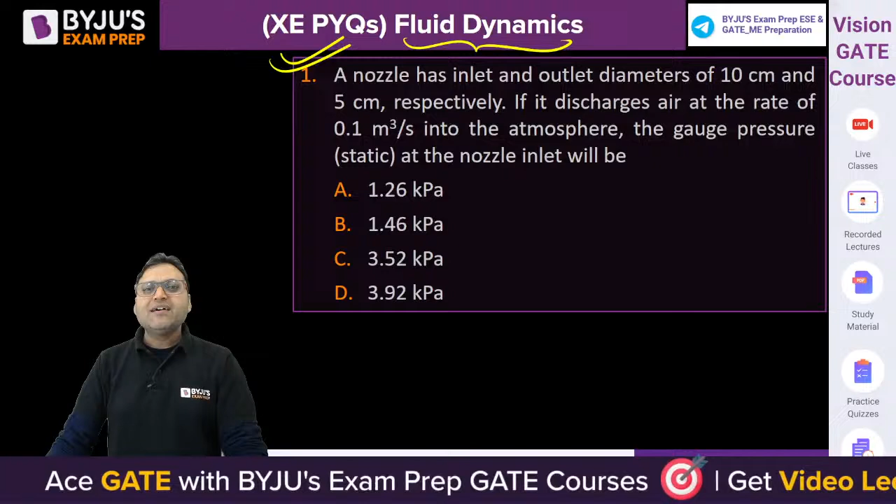All right, so let us start with question number 1. The questions are from dynamics, which will include the ideal flow, that is Bernoulli equation and its application, and real flow. Including ideal and real flow, we will discuss some important questions which were asked in previous GATE engineering science paper. The difficulty level of engineering science paper is same as that of your GATE ME or CE papers. So it is going to help you a lot in improving your fundamentals, in knowing your level of preparation. If you are able to solve these questions without any support, without any help, it means your preparation is up to the mark.

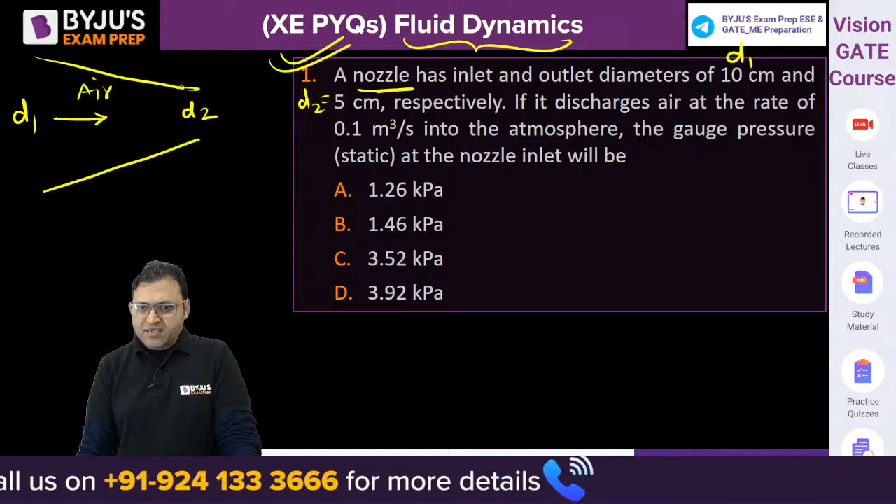The question says a nozzle has inlet and outlet. What is a nozzle? A converging section. The nozzle is having an inlet diameter D1 and outlet diameter D2. D1 is 10 centimeter and D2 is 5 centimeter. If it discharges air - the fluid flowing is air - when we are using air in fluid mechanics, we will assume it as incompressible fluid, right? The discharge of air flow is 0.1 meter cube per second into the atmosphere. We need to find out the gauge pressure at the nozzle inlet, at point 1. Can you calculate the gauge pressure at 1? Can you give it a try quickly?

Can you try it? Yes, every one of you, please give it a try. The first equation we are supposed to use is the continuity equation, that is the mass conservation, because the flow is assumed to be steady, incompressible and one dimensional. So we can say A1 V1 is equal to A2 V2 is constant. Discharge will remain constant. So we can say D1 square into V1 is equal to D2 square into V2.

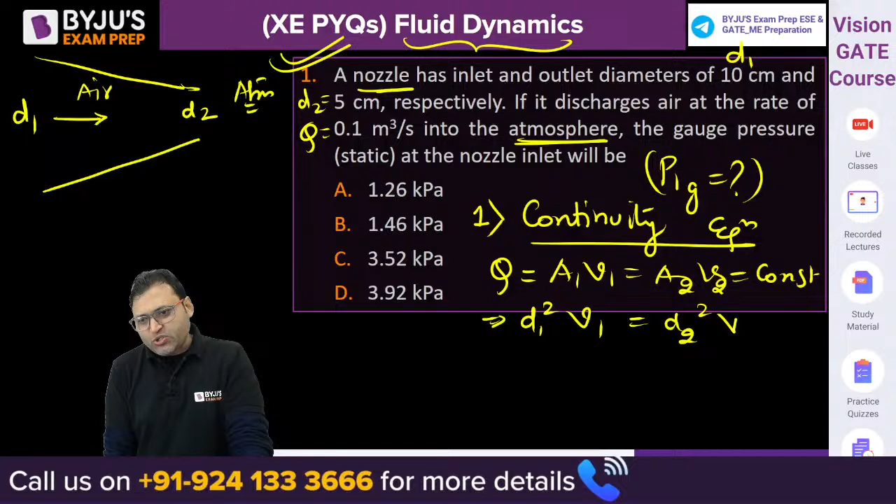D1 and D2 are given to us. So can you develop a relation between V2 and V1? Is this the right relationship between V2 and V1? V2 is 4 times of V1 because D1 is twice of D2. Velocity at 2 will be more, it is 4 times of V1.

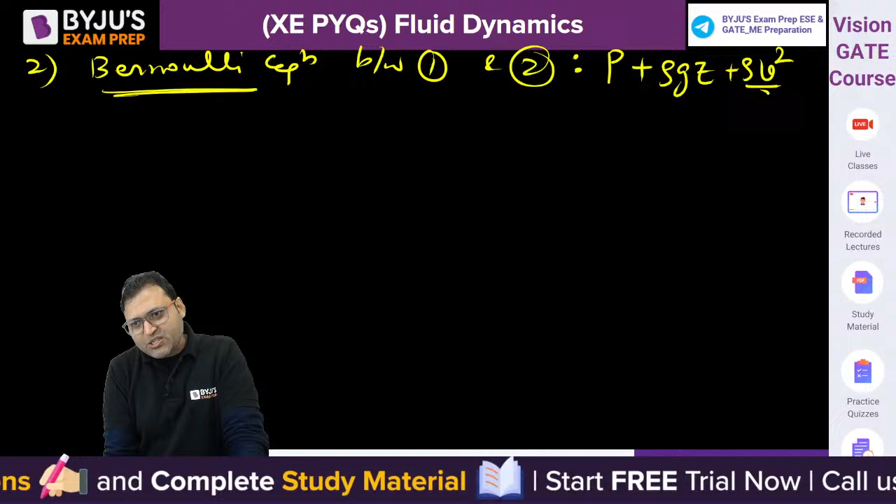Then the next equation is the Bernoulli equation between 1 and 2, inlet and outlet. Bernoulli equation is the energy equation in case of ideal flow. If we write the Bernoulli equation in terms of pressure, P plus rho g z plus rho V square by 2 is constant, isn't it? So can we write P1 plus rho g z1 plus rho V1 square by 2 is equal to P2 plus rho g z2 plus rho V2 square by 2.

It is a horizontal pipe, there is no change in potential energy. We can either take the gauge pressure or the absolute pressure. The gauge pressure at point 2 is 0 because the fluid is discharged into the atmosphere. So we can easily find out P1 gauge. It is rho by 2 into V2 square minus V1 square, isn't it? V2 is equal to 4 V1, so it will be 16 V1 square minus V1 square, that is 15. So P1 gauge is equal to 15 rho V1 square by 2. This will give you the answer.

What is V1? Q is equal to pi by 4 D1 square into V1. From here we can find out the value of V1, 4Q by pi D1 square. Put the value 4 into Q; discharge is given as 0.1. Upon pi, what is D1? D1 is 10 centimeter, so 0.1 meter, 0.1 square. This will get cancelled out. What will be the value of V1? 4 upon 0.1 pi, isn't it? 40 by pi. So V1 will be equal to 12.73.

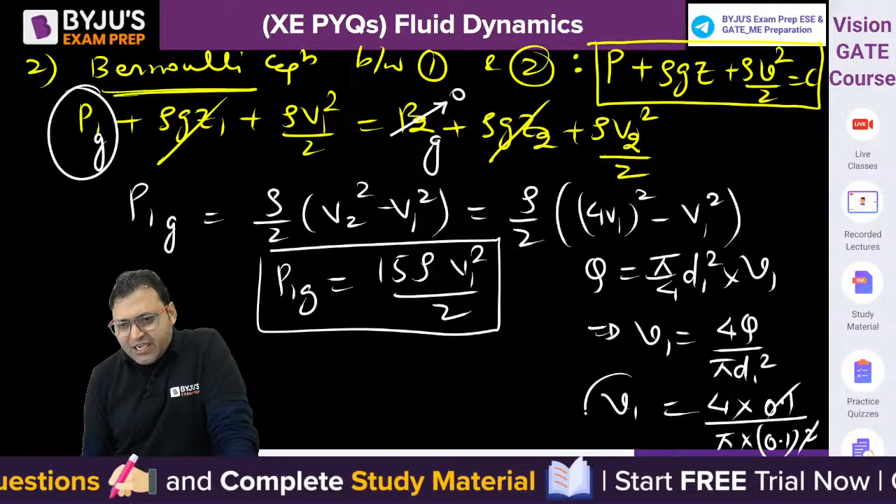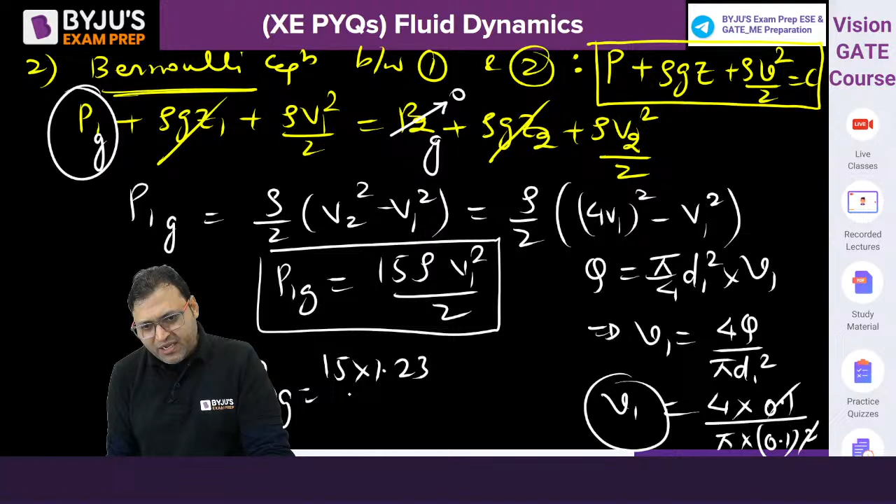Yes, well done. So V1 you can easily find out. Put the value in P1 gauge. Air density is not given, but you should have an idea. Density of air is around 1.23 kg per meter cube. So it is 15 into 1.23 by 2 into V1 square, 12.73 square. That will be in Pascal, so it will be around 1459 Pascal. In kilopascal, it is around 1.46.

Are you guys getting it or not? Yes? The answer B is the correct answer. Yes, well done. Good, good, good. What about others?

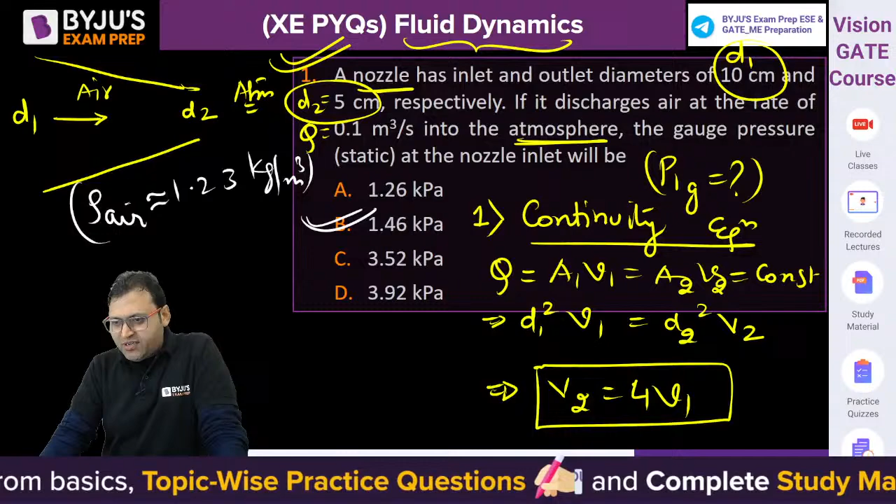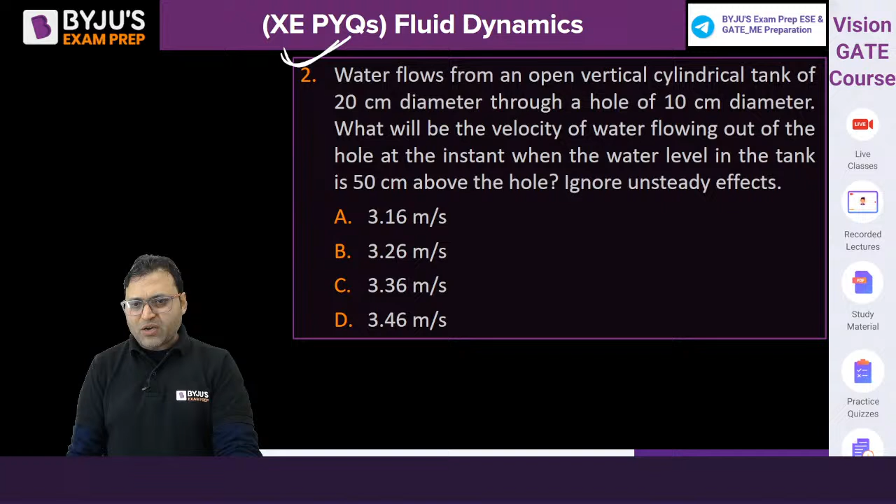Question number 2 on your screen. The previous question was asked in GATE 2009. Let me write, this was asked in 2009. And this question number 2 was also asked in 2009. Can you solve this?

Water flows from an open vertical cylindrical tank. There is a cylindrical tank, open from the top, of 20 centimeter diameter, capital D is 20 centimeter, through a hole of 10 centimeter diameter. Small d is equal to 10 centimeter. The water is flowing like this. The fluid is water. What will be the velocity of water flowing out of the hole? We need to find out this velocity.

What is the velocity of the fluid flowing out of the hole at the instant when the water level in the tank is 50 centimeter above the hole? This is, let us say, H, which is equal to 50 centimeter. Ignore unsteady effects. Can you simplify this? This is the free surface.

So again, if we apply the equations between 1 and 2, let me call this point 1 and this, let us say, 2. So P1 and P2 will be equal. P1 is equal to P2 is equal to P atm. If we take this as reference line, then Z1 is equal to 0 and Z2 is equal to H, that is 50 centimeter. So first of all, apply the continuity equation.

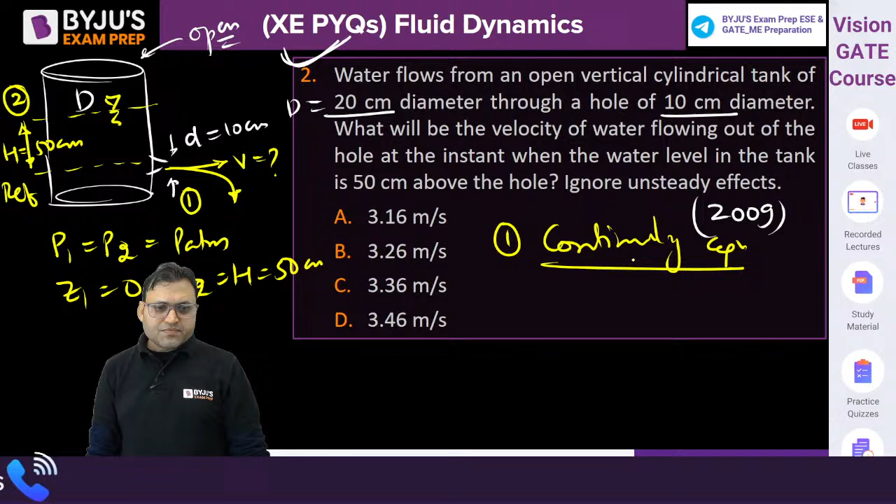So we can say discharge remains constant. So discharge decreasing will be equal to discharge leaving. Here the velocity is, let us say, V2. Here the velocity is V1. So can we say Q is equal to pi by 4 D square into V2 is equal to pi by 4 d square into V1. Pi by 4 getting cancelled out. Again we can develop a relation. V1 is equal to 4 times of V2, isn't it?

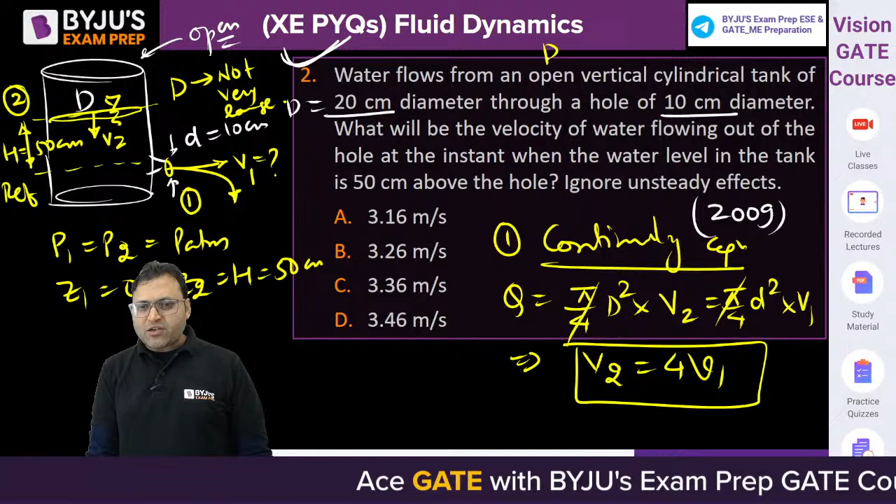Discharge will remain constant. Discharge decreasing in the tank is equal to discharge leaving from the orifice. Yes or no? So V2 is not taken as 0 because the diameter is not very large compared to small diameter. That is the catch here. The diameter, capital D, is twice of small d. So V2 cannot be ignored. V1 will come out to be 4V2. Now we apply the Bernoulli equation, similar to the previous question.

If we apply the Bernoulli equation, P1 by rho g plus Z1 plus V1 square by 2g is equal to P2 by rho g plus Z2 plus V2 square by 2g. Z1 is equal to 0. P1 and P2 are equal. Our objective is to find out V1 square. So we can say V1 square minus V2 square by 2g is equal to Z2, that is H. So V1 square minus V2 square is equal to 2gH.

And what is V2? V1 is equal to 4V2. Let us put V1 is equal to 4V2. So 16V2 square minus V2 square is equal to 2gH. So V2 is equal to under root of 2gH upon 15. And what is V1? V1 is equal to 4V2. So it is 4 under root of 2 into 9.81, or let me call it 10, into H 0.5 upon 15 meter per second. That is the value of V1.

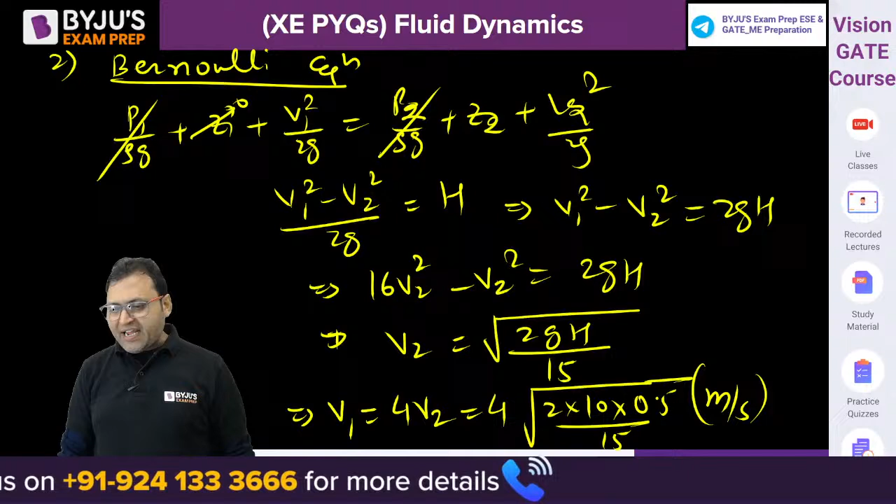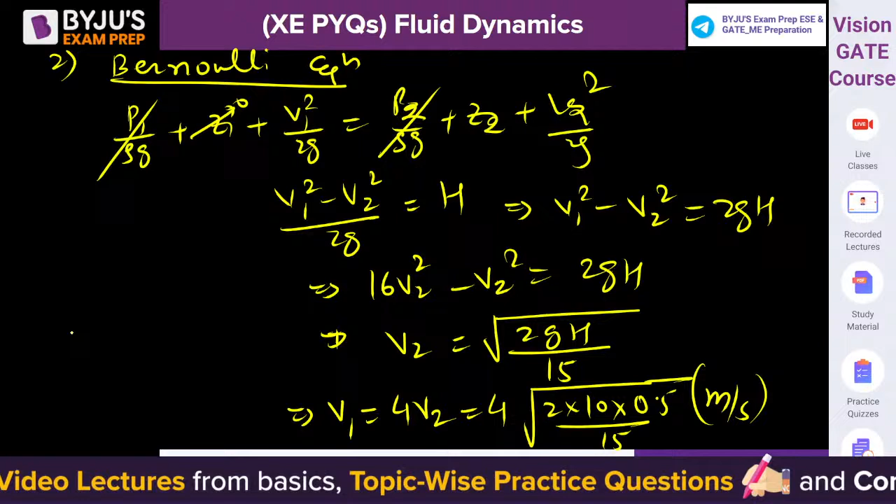Because the diameters are not, we write root 2gH only when the area of the tank is very, very large compared to the area of the orifice. Then we can say velocity in the tank is ignored, it can be taken as 0, then we can say velocity V1 is equal to root 2gH. But because the area of the tank is not very large, so how much is that?

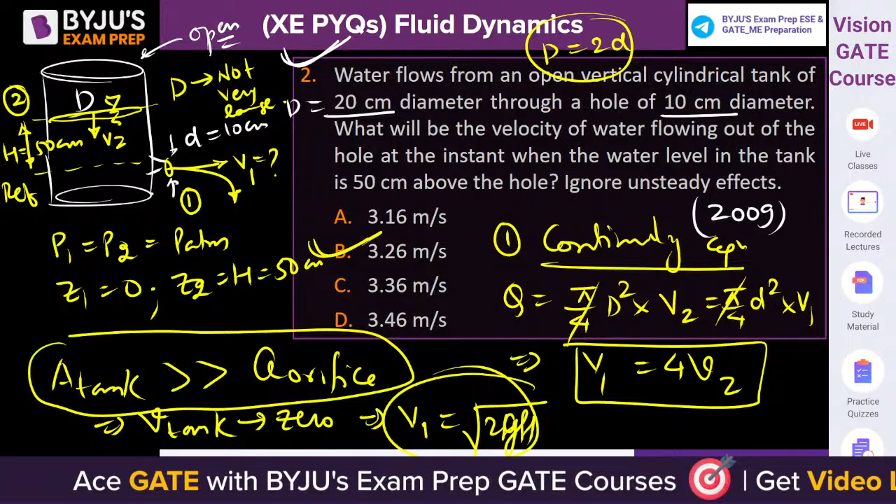50/15, sorry, 10/15, 2/3, under root into 4, 3.2659. Are you getting 3.26 something? B is the correct answer. Something around 3.26. B will be the correct answer for this one, right?

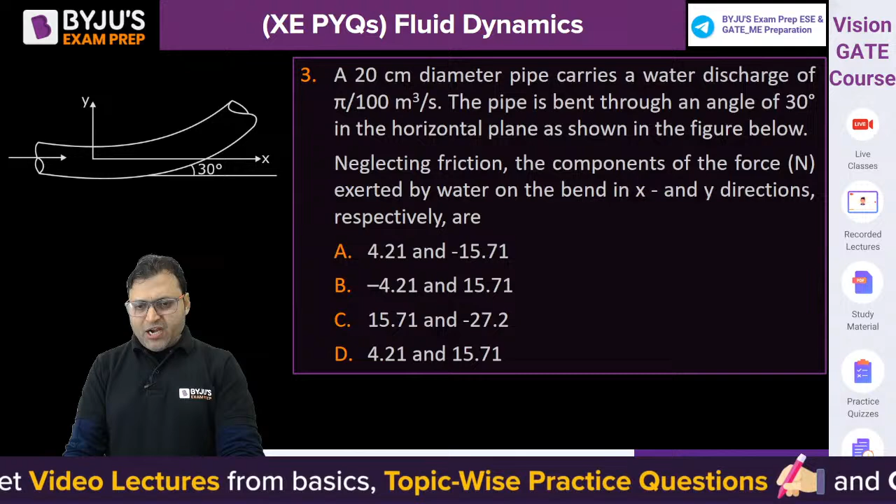The next question, question number 3. Try to solve the next one. Did you understand the question? This question was asked in 2010. A 20 centimeter diameter pipe carries water discharge of pi by 100 meter cube per second. The pipe is bent through an angle of 30 degree in the horizontal plane as shown in the figure. Neglecting friction, the component of force exerted by the water on the bend section in x and y direction will be?

So if you take this as the control volume, before the bend and after the bend, this is our control volume, isn't it? This is under observation. Due to the bend, there are forces developed and the water will exert a force on the walls of the pipe in normal and compressive direction. The force exerted by the water is normal and compressive, like this. This is the direction of force exerted by water.

And due to curved streamline, do you agree pressure at 1 is less than pressure at 2? In case of curved streamline, pressure on the inner walls will be less than pressure on the outer walls, and area due to contraction or due to bend, A1 is less than A2. So the force F1 will definitely be less than force F2. This is F1, this is F2. So F2 is greater than F1. So the net force will be like this.

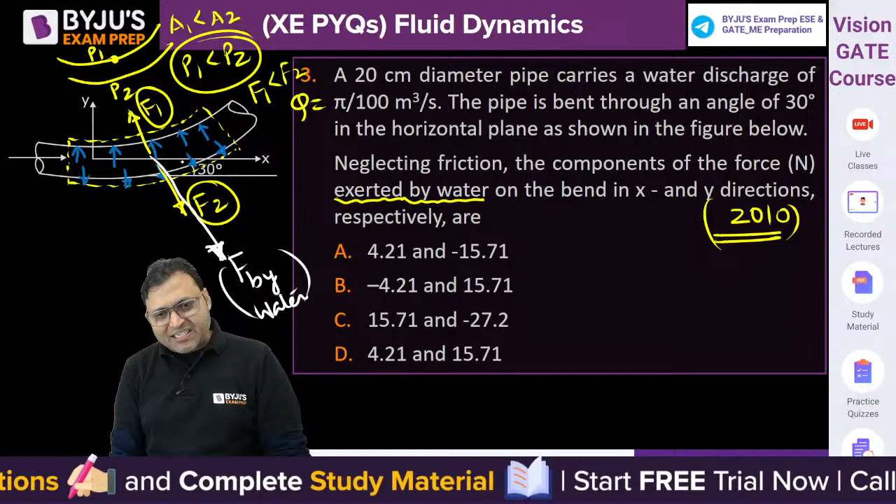The net force by the water on the bend is in this direction. Its component is in positive x direction and another component is in negative y direction, isn't it? There are two components of force by the water. One is positive x, another is negative y. Negative x is incorrect and both positive is also incorrect. B and D cannot be correct. It is either A or C, isn't it? Now we need to calculate the magnitude by using the momentum equation.

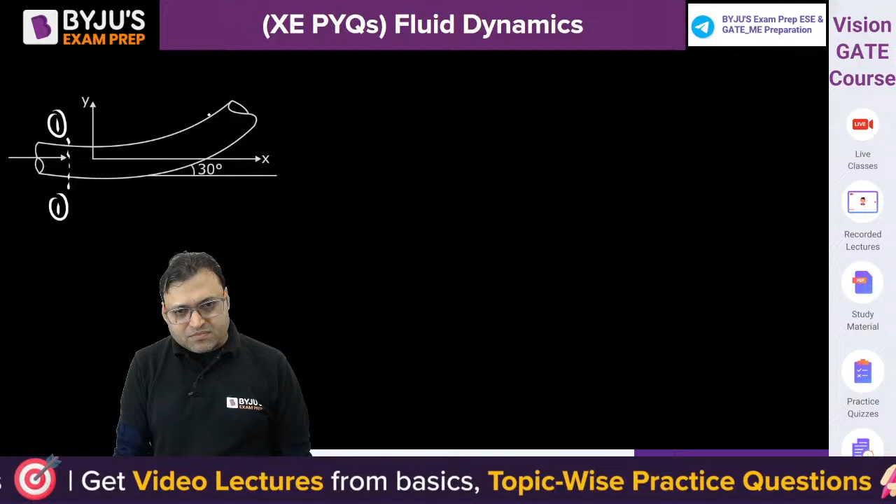We can say here, if we calculate the momentum equation, this is section 1, let us say, this is section 2, this is our control volume. So we can say area at 1 is equal to area at 2. So V1 is equal to V2, there is no change in velocity, and Z1 is equal to Z2 because it is in horizontal plane. So we can say according to Bernoulli equation, P1 is equal to P2. That is the Bernoulli equation.

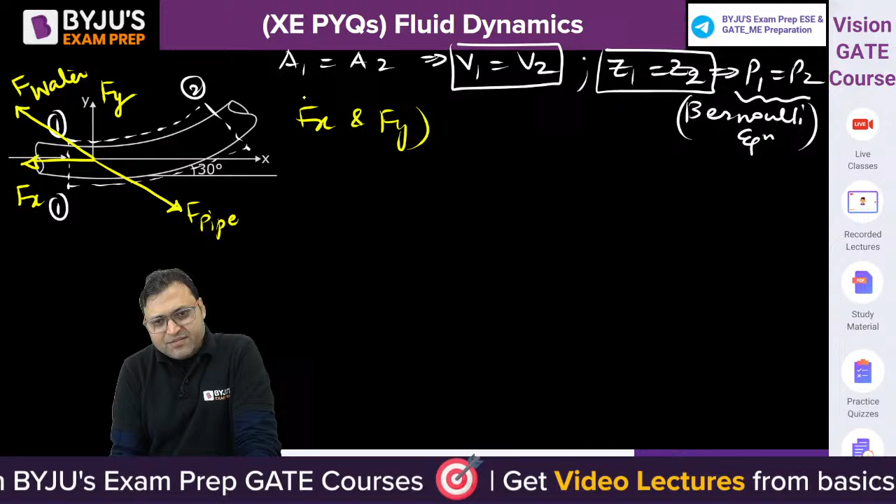Now if we assume Fx and Fy, Fx and Fy are forces on the fluid. So force on the pipe will be like this, and force on water will be like this. Force on water will have two components, one is Fx and another will be Fy. So Fx and Fy are forces on water in X and Y direction respectively.

So if we apply the momentum equation, first of all let us write the momentum equation in X direction for the water. This is our control volume. So P1A1 will be acting in X direction, then minus Fx force on the water, then P2A2 component minus P2A2 cos 30 is equal to rho into Q, density into discharge, into change in velocity, because we are writing the momentum equation for the water.

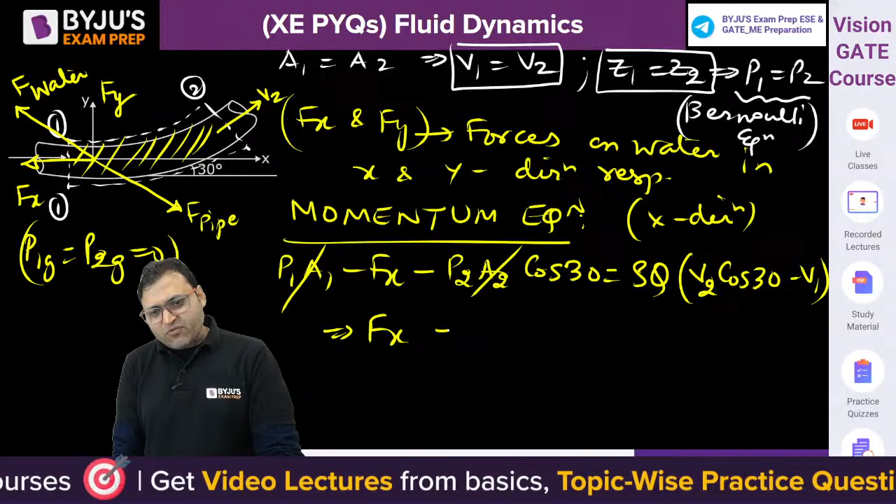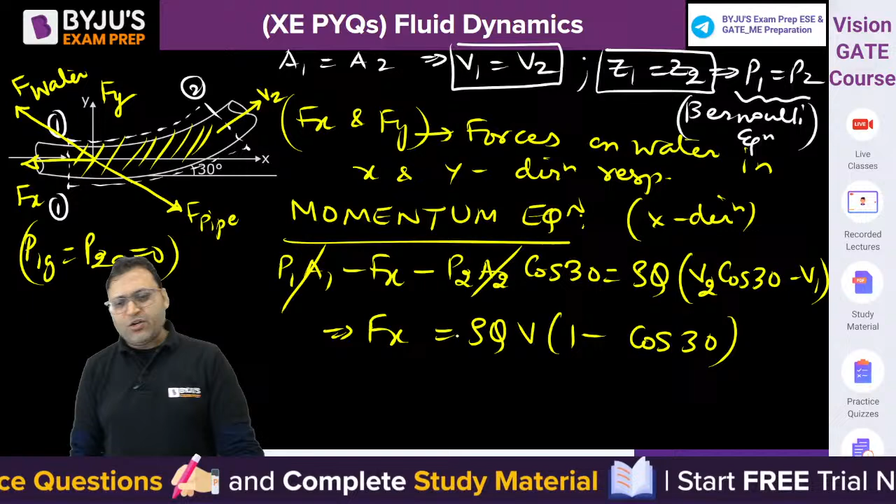So final velocity V2 cos 30 minus V1. P1A1 and P2A2 are both 0. P1 gauge is equal to P2 gauge is equal to 0. So we can say Fx will be equal to rho into Q into V into 1 minus cos 30. What is V? V can be written as 4Q by pi d square. So rho Q 4Q upon pi d square into 1 minus cos 30.

Can you solve it? Cos 30 is root 3 by 2. Can you solve it and let me know the answer? Can you find out the value Fx? Discharge is given, density is 1000. So if you are able to calculate Fx, diameter is given as 20 centimeter. Put the values, you will get the answer. Can you solve it?

Are you getting 4.21 Newton or not? Are you guys getting 4.21? 4.21 Newton. So Fx will be 4.21. So that is why C is not correct. A will be correct. Similarly, you can write Fy. This is Fy in Y direction.

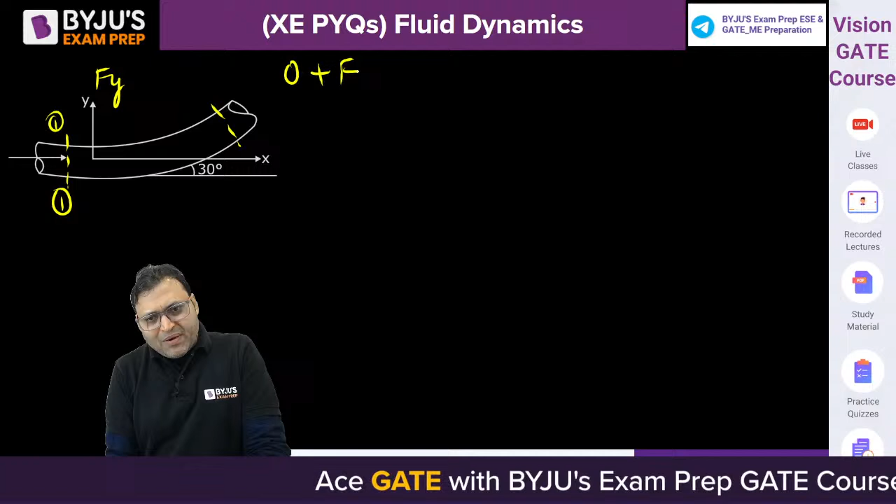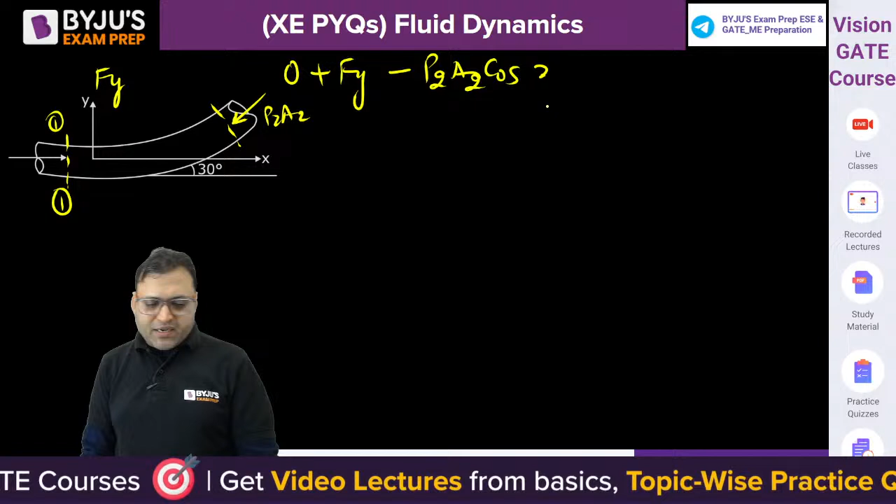So the component of P1A1 in Y direction is 0 plus Fy. Then component of P2A2 will be negative, minus P2A2 sine 30, is equal to rho into Q into final velocity V2 sine 30 minus 0, initial velocity in Y direction is 0. This is how we apply the momentum equation in Y direction. We can easily calculate Fy.

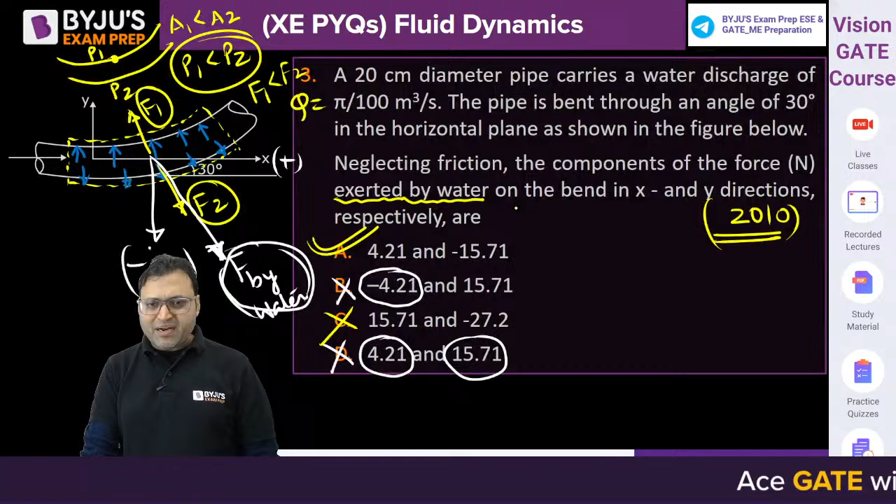This will be 0. So Fy is equal to rho into Q into V into sine 30, or 10 to the power 3 into pi by 100, into 4Q by pi d square, 0.2 square, into sine 30. How much is sine 30? Actually, velocity will come out to be 1 meter per second. Sine 30 is 1 by 2. So this will be in Newton. Are you getting Fy to be 15.71 Newton?

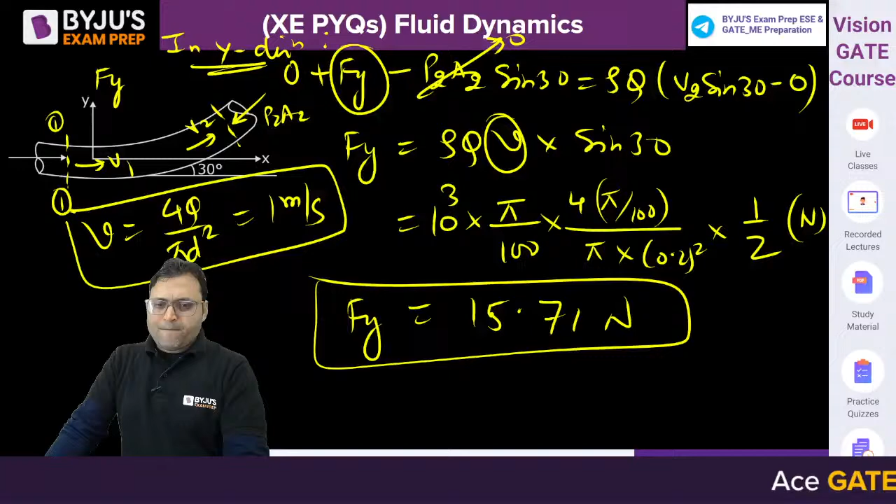If you calculate the velocity, that is 4Q by pi d square, you will get 1 meter per second. So instead of writing V as 4Q by pi d square, you can take V as 1 meter per second as well. So that is why the correct answer is option A. Well done. What about others? Do you guys understand how to write the momentum equation? I hope you understood.

The next question on the screen.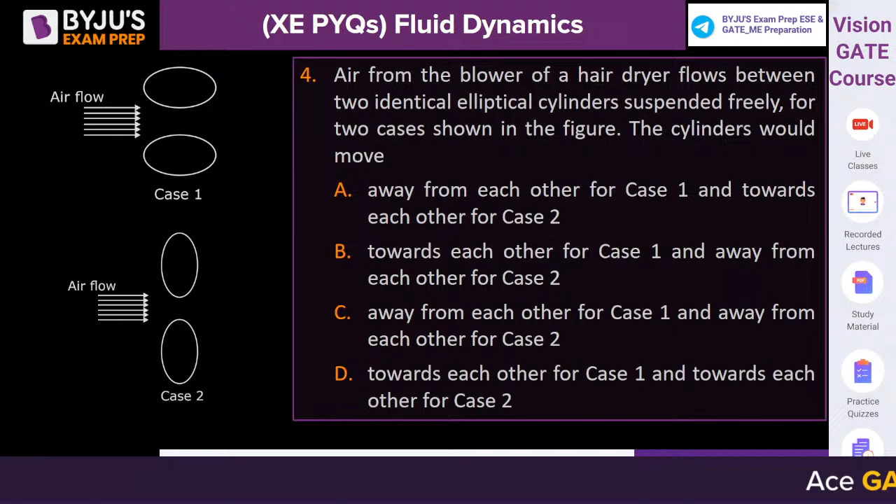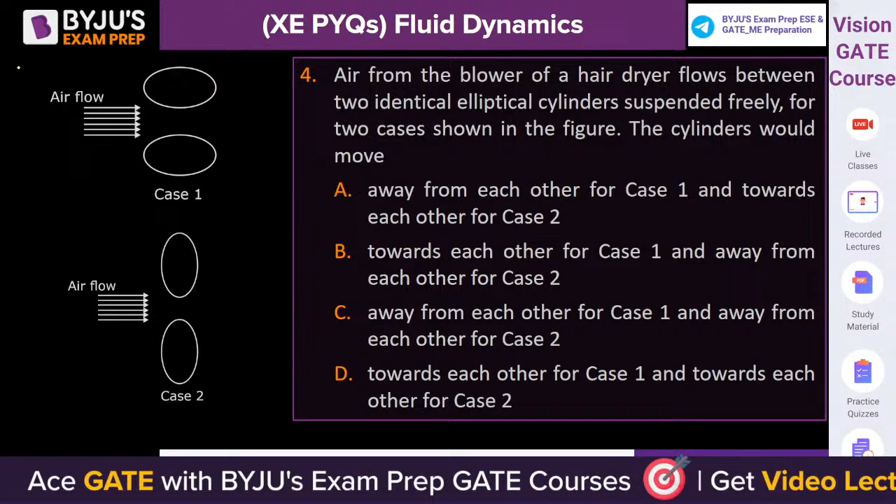Air from the blower of a hair dryer flows between two identical elliptical cylinders suspended freely. They are like balloons. For two cases shown in the figure, the cylinders would move. This is case 1, here balloons 1 and 2 are kept, and in the second case balloons 1 and 2 are kept. There is an airflow. So which will be the correct answer for this one? What will be the answer?

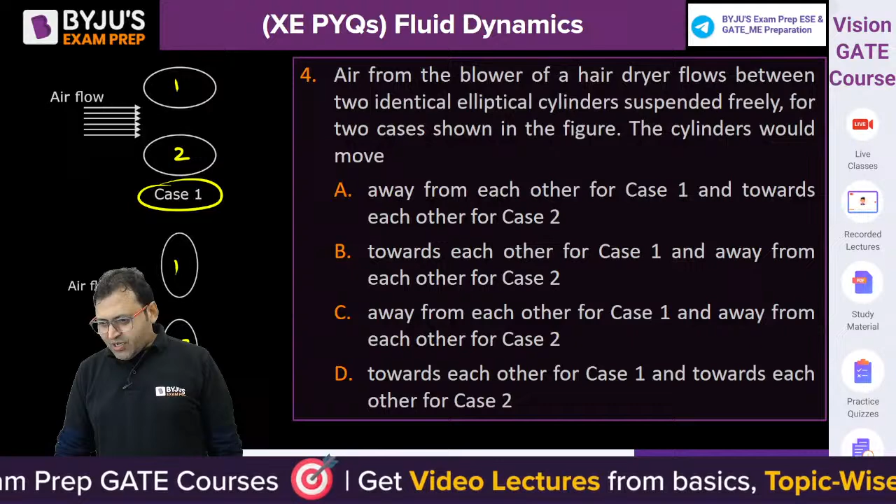Yes, everyone. I am waiting for your answer. Waiting for your answer. No one is saying option D: towards each other for case 1 and towards each other for case 2. Here are the options. What will be the answer?

Is there any difference if the cylinders are kept in different orientation?

Hi Shayad. Welcome. Good, good. D. Crazy Meteor is saying B.

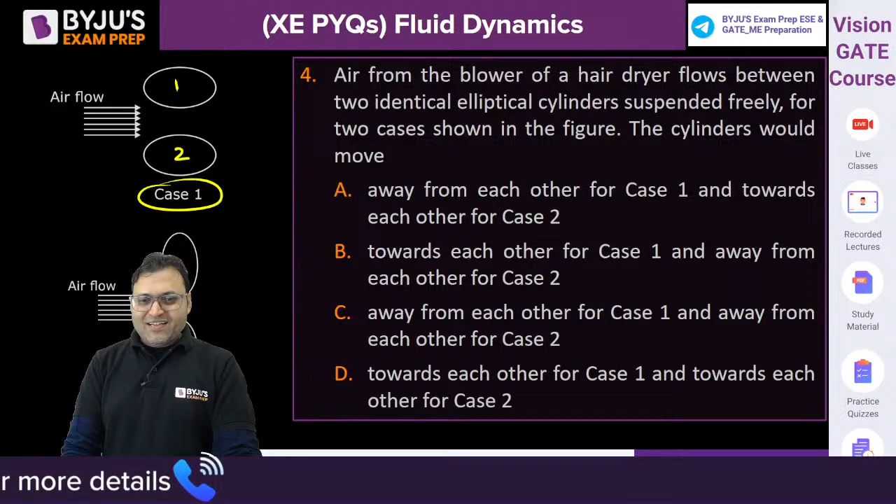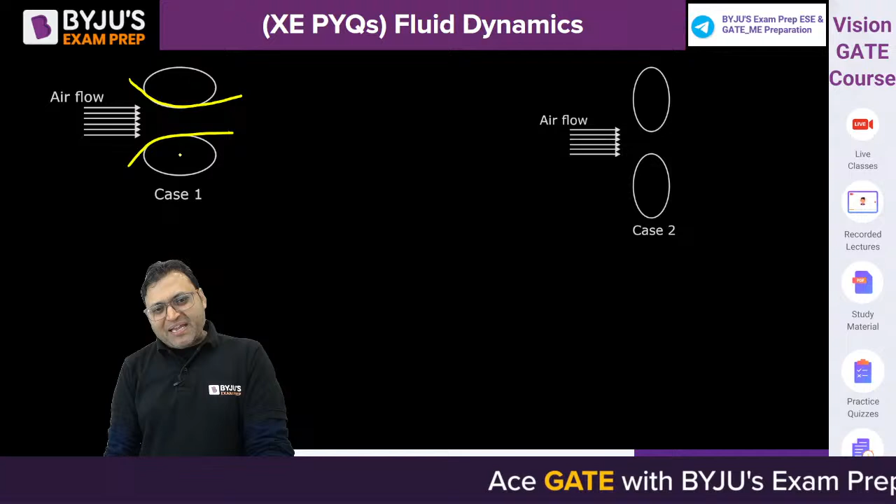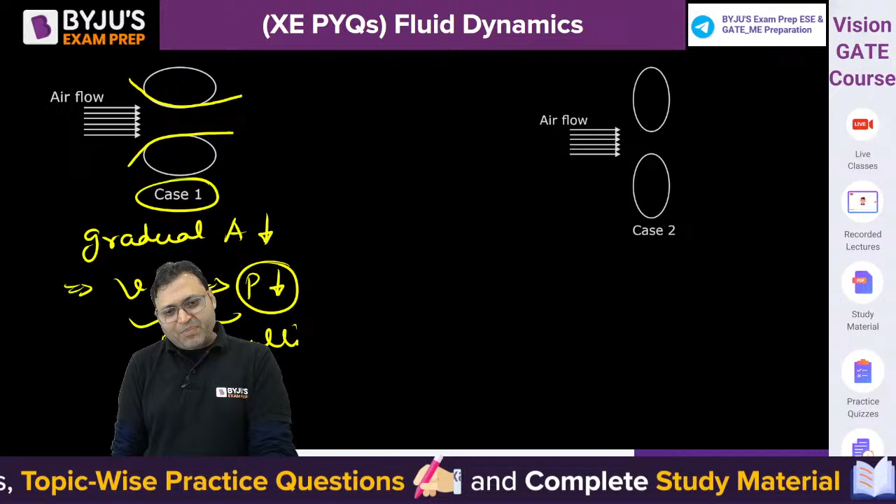Let me tell you, when the elliptical cylinders are kept like this, in case 1 there is a gradual decrease in area. If the area decreases, then the velocity will increase, and if velocity increases, then the pressure will decrease. That is the Bernoulli principle. We can apply the Bernoulli equation. So between the gap, the pressure will decrease.

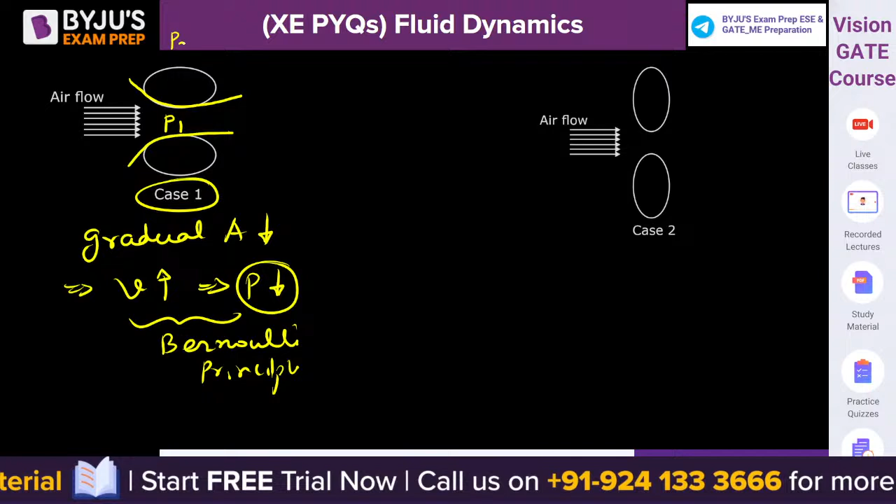So here, if I call this pressure P1, and the pressure outside P2, we can say P1 will be less than P2. So in case 1, area decreases, velocity increases, so pressure will decrease. The ellipse will move from high to low pressure; there will be force developed from high to low pressure. So they will be moving towards each other, isn't it?

But here, if the ellipses are kept like this, then there is a sudden convergence. Whenever the fluid strikes here, due to sudden convergence, the area will decrease suddenly, and the velocity will decrease. This is from momentum transfer: due to sudden convergence, there is a momentum transfer to the balloon. The air will strike on the balloon and the velocity of air will decrease.

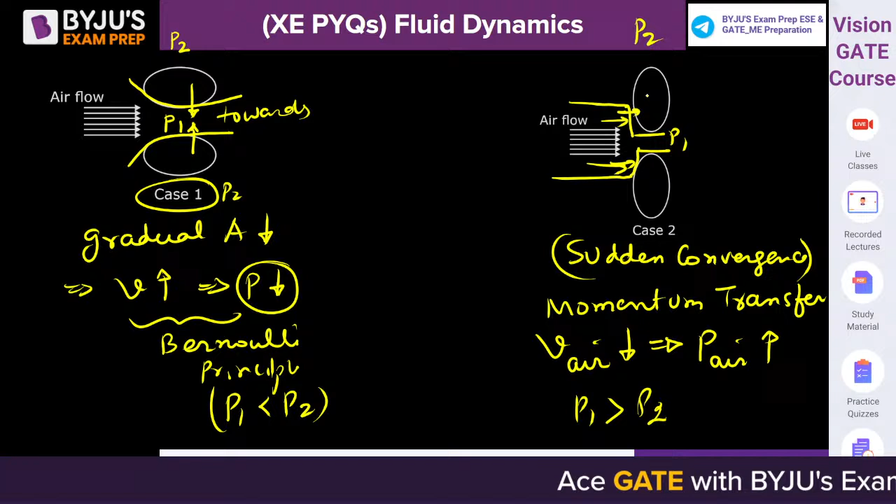When the velocity of air decreases, pressure of air will increase. So here P1 will be greater than P2. So there is a force acting which will move the balloon in outward direction. The first case is about energy conservation, the Bernoulli principle. The second is due to momentum transfer.

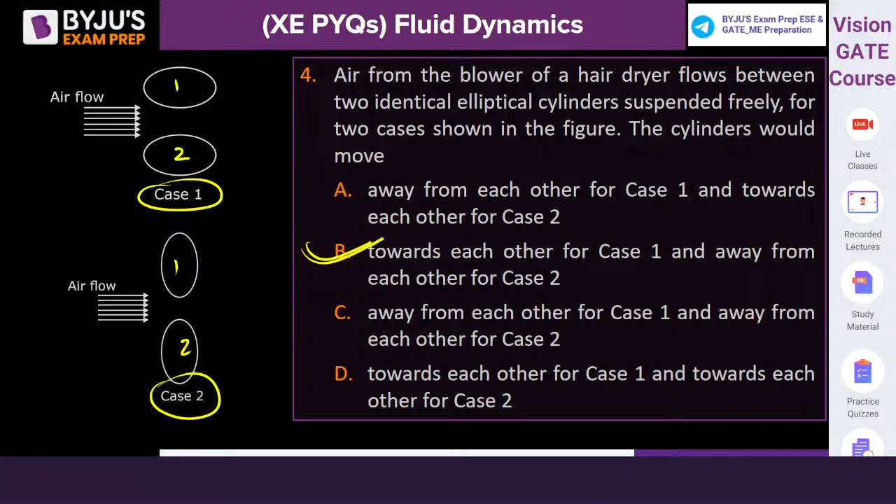Are you getting it? In first case, the pressure will decrease between the cylinders. In second case, pressure will increase. Why? Because in second case, velocity will decrease. It is like a pitot tube. If there is a restriction in the flow path, the fluid will strike the restriction, the velocity will decrease and transfer the momentum, and pressure increases due to kinetic energy getting converted into pressure energy.

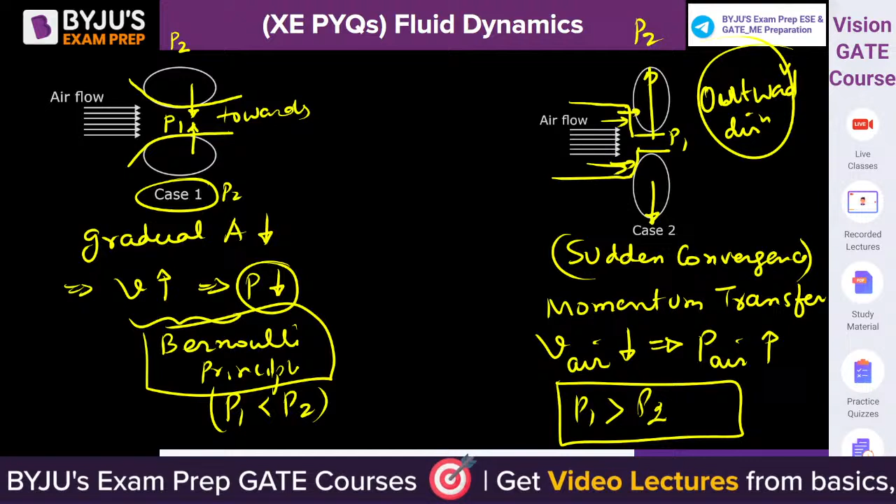I hope that is clear. Please let me know. Only Crazy Meteor had given the correct answer. In the second case the kinetic energy of the fluid gets converted into pressure energy, so pressure of air increases between the cylinders, but in first case the pressure decreases due to gradual decrease in area.

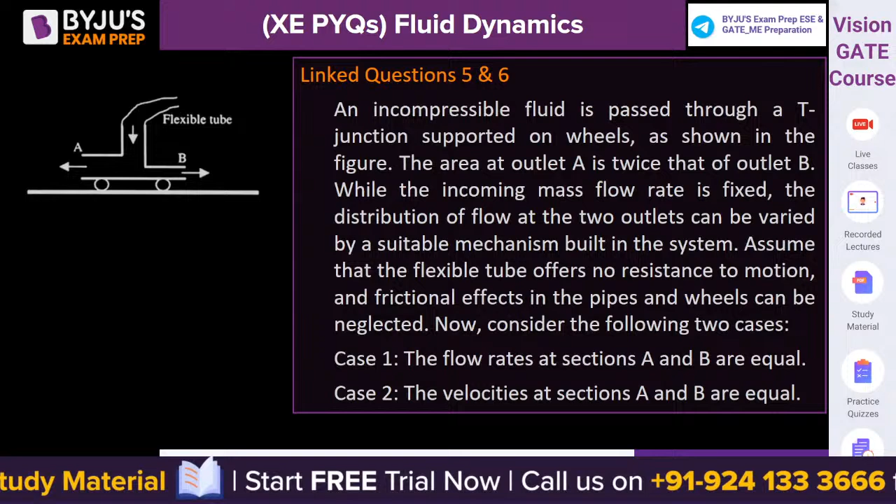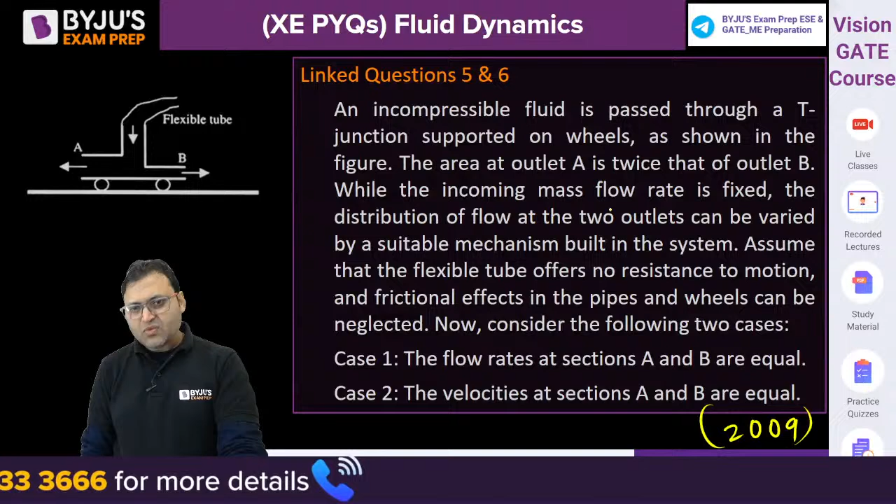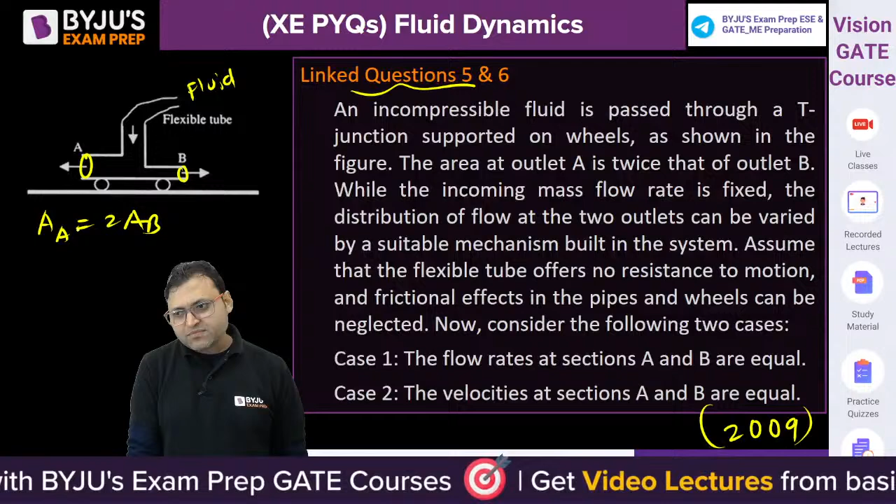The next question. This question was asked in 2009. Read the question. Linked question, there are two questions, 5 and 6. An incompressible fluid is passed through a T junction supported on wheels as shown in figure. The area at outlet A is twice that of outlet B. AA is twice of AB.

While the incoming mass flow rate is fixed. Q is constant; discharge is constant. The distribution of flow at two outlets can be varied by a suitable mechanism built in the system. Assume that the flexible tube offers no resistance to the motion, and frictional effect in the pipe and the wheels can be neglected. Now consider the following two cases.

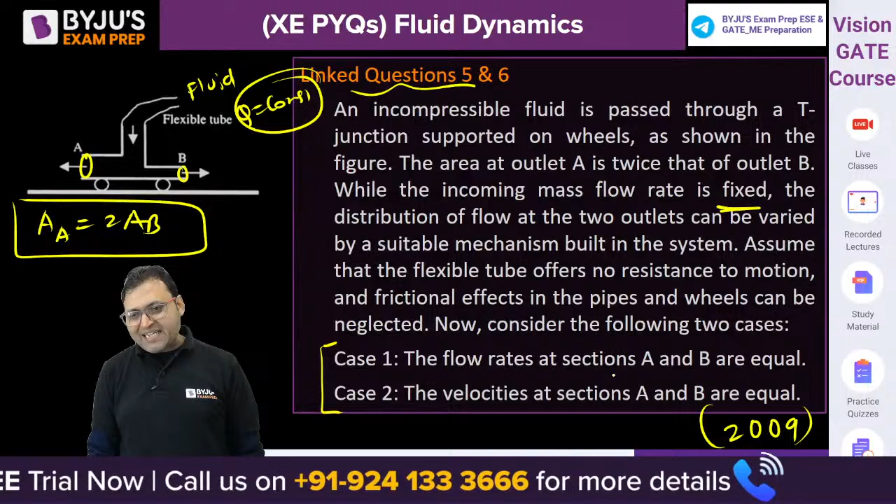In case 1, the flow rates at section A and B are equal. It means QA is equal to QB, we can call it Q. Discharge remains constant in both the tubes. And in second case, the velocity at section A and B are equal: VA is equal to VB, that is V. In first case, the discharges are equal, isn't it?

Do you understand it? Now question number 5 on your screen. Which of the following statements are true? In case 1 we know discharge is constant. In case 2 we know velocity is constant. So in case 1, the velocity at section A is twice the velocity at section B.

And in case 1, the velocity at section A is half of the velocity at section B. Out of P and Q, only one is correct. Out of R and S, only one is correct. P and Q, one option is correct. R and S, one option is correct. Bataiye. Can you give it a try?

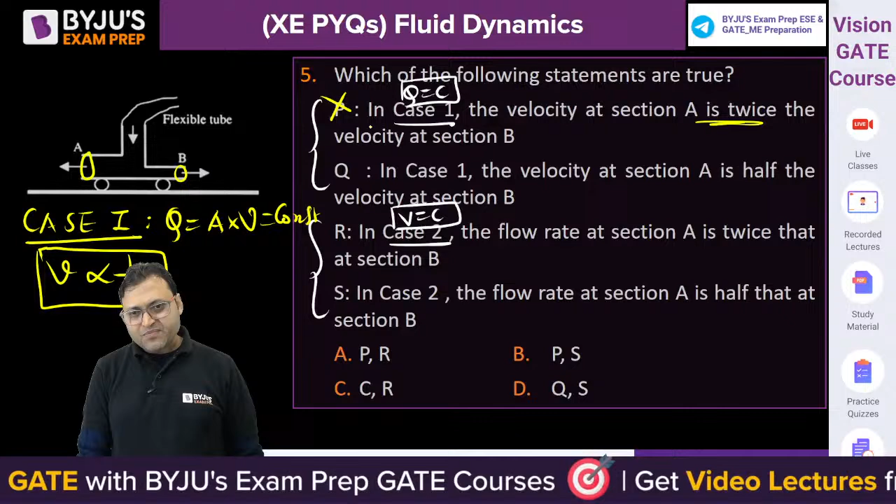If we talk about case 1, discharge, that is area into velocity, is constant, isn't it? So we can say V is inversely proportional to area. In case velocity is inversely proportional to area, more area, less velocity. Less area, more velocity. So the velocity at A will be less than B. Velocity at A is twice, that is incorrect. Velocity at A is half, that is true. Isn't it? Q is correct.

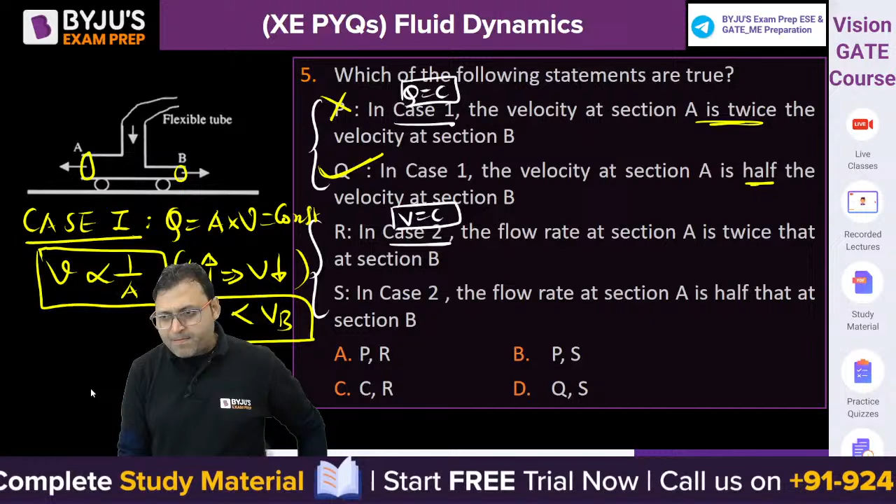In case 1, velocity is inversely proportional to area. If area increases, velocity decreases. So velocity at A will be less than velocity at B, isn't it? If we talk about case 2, velocity is constant. If the velocity is constant, means discharge is directly proportional to area.

If area increases, discharge also increases, yes or no? So more is the area, more will be the discharge. QA will be greater than QB, yes or no? So in case 2, the flow rate at section A is twice. Definitely correct. Flow rate at A is half? No, the flow rate will be directly proportional to area if the velocity is constant. So it is Q and R.

अच्छा ये Q है. C and R means Q and R. This is Q actually. Isn't it option C? Yes or no? Option C is the correct answer.

The next part of the question. Which one of the following statements is true? The next part is about the momentum equation. The system will move to the left, the system will move to the right. In case 1, Q is constant. In case 2, V is constant. So the change in momentum of the fluid will decide. What is the momentum per second? That is rho into Q into V. That is the momentum flow rate.

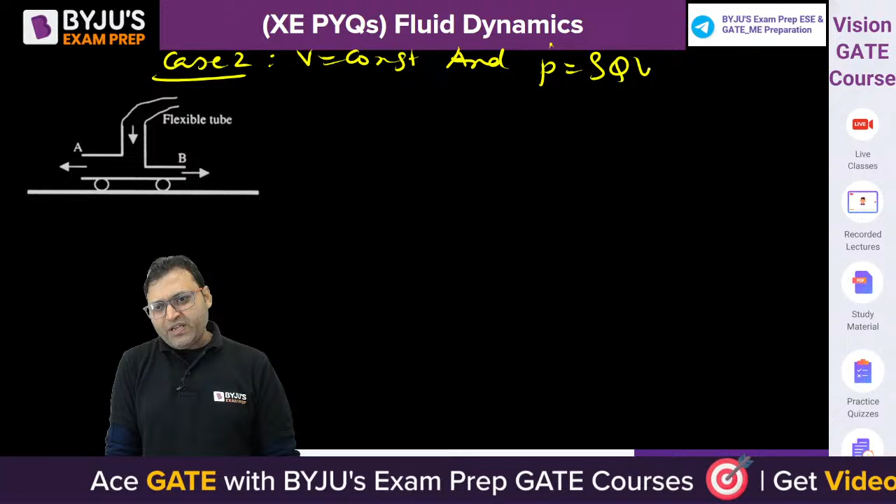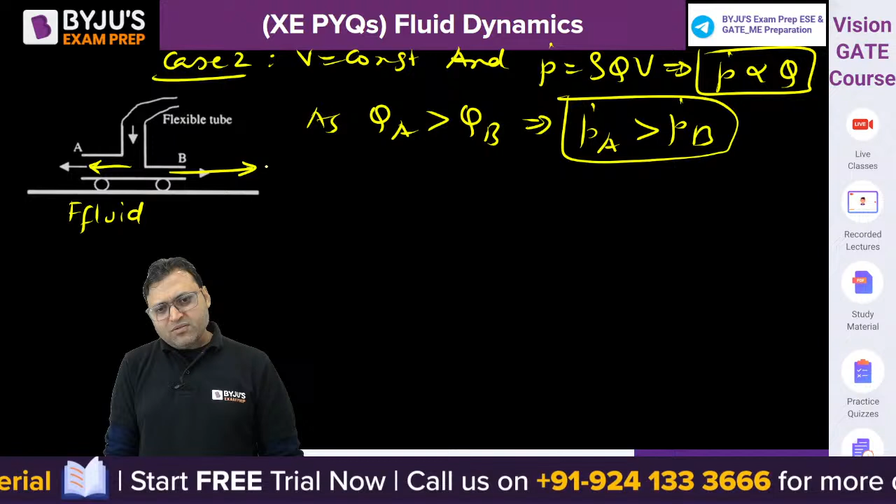And if we talk about case 2, V is constant and momentum flow rate is rho QV. So we can say P dot is directly proportional to Q. And as QA is greater than QB, P dot A is greater than P dot B. So the force on the fluid will be in this direction. According to Newton's third law, force on the system will be equal and opposite. So in case 2, the system will move towards right.

P and S. There is no P and S. कुछ गड़बड़ हो गया क्या? P and S. There is no option. कुछ ना कुछ मिस्टेक हुआ है.

यहां तो P और S होना चाहिए था. ये P और Q एक साथ हो नहीं सकते. P and Q cannot be together, both cannot be correct simultaneously. Similarly, both R and S cannot be correct simultaneously.

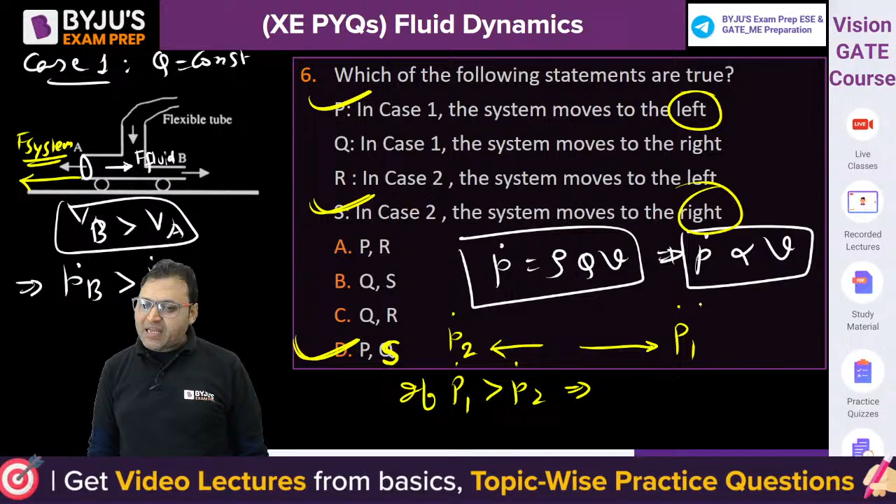देखिए, अगर fluid का momentum इधर ज्यादा है P.1 और इधर fluid का momentum कम है P.2, if P.1 is greater than P.2, then the fluid will have a momentum, or force is the rate of change of linear momentum. Change in momentum flux is the force. F is equal to the force exerted will be equal to rate of change of linear momentum, delta P dot, isn't it? The force exerted is the rate of change of momentum. If P.1 is more than P.2, then the force on the fluid will be in this direction, then only the momentum increases. Force on the fluid, yes or no? Are you getting it?

So in case 1, the system moves to the left, and in case 2, the system moves to the right. Do you get it or not? Is this clear or not? Please do let me know.

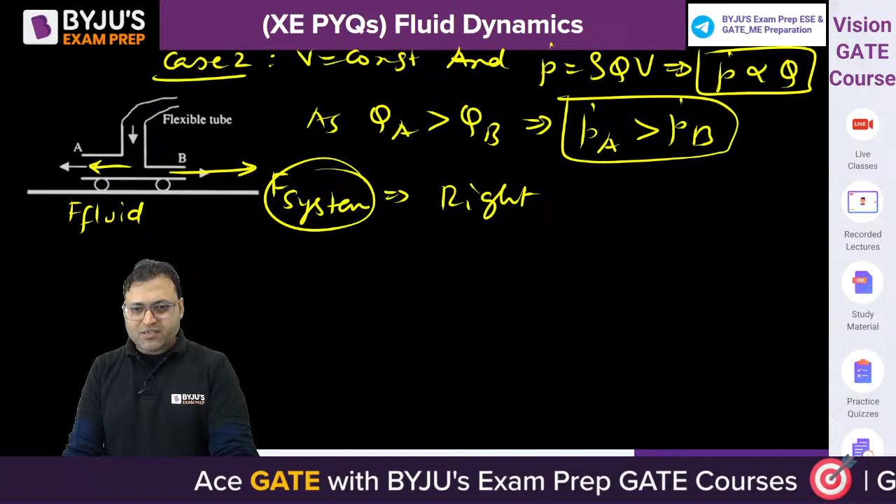Option D गलत लिखा हुआ है, because P and Q together cannot be simultaneously true. Similarly, R and S cannot be simultaneously true. So it should be PR, PS, QR and QS as the options.

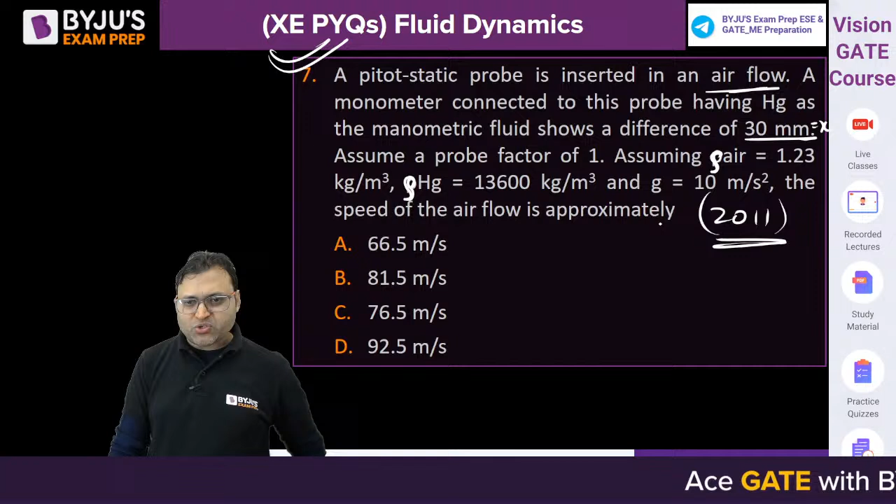The velocity is given by Cv under root of 2gh, and h is equal to Sm by Sf minus 1. So if you put the value, Cv is taken as 1, so the velocity will be equal to under root of 2gx into density of manometric fluid by density of flowing fluid minus 1. So put the values, you will get the answer. It is simple. Put the values, you will get the answer.

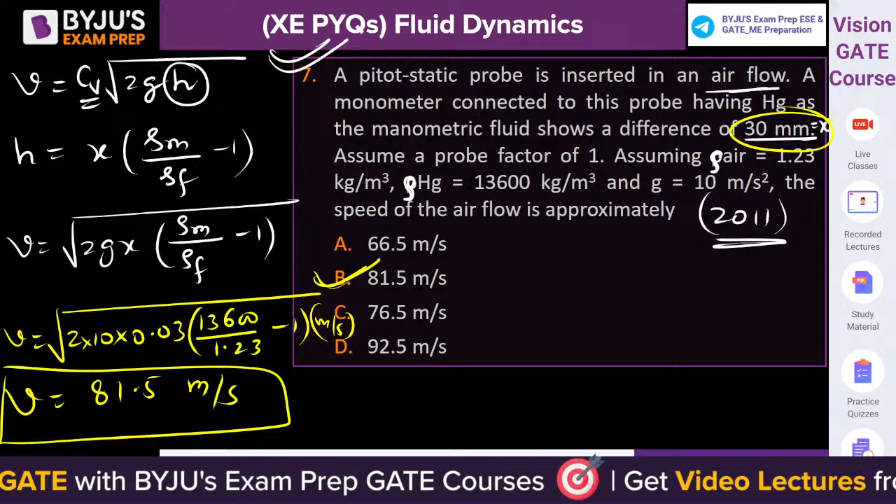X is the manometric fluid deflection: 2 into 10 into x, 30 mm, 0.03, into 13,600 upon 1.23, minus 1, that will give meter per second. What is the answer? Are you getting around 81.5 meter per second? I hope you are getting 81.5 meter per second. B is the correct answer. Well done, B will be the answer.

Question number 8, simple. The next one, question number 8 on the screen. When a large tank containing water is placed on a weighing scale, this is the weighing scale.

A reading of 10,000 Newton is obtained. Now the tank is fitted with an outlet pipe. This is the outlet pipe.

And a valve as shown in figure. When the valve is opened, a jet of water with a velocity of 10 meter per second issues out in the vertically upward direction. The diameter of the outlet pipe is 10 centimeter, that is D.

Determine approximately the reading on the weighing scale at the instant the valve is opened and the water jet issues out. Density of water is 1000 kg per meter cube.

When the jet issues out, there is an increase in momentum of the jet. Initially the velocity of jet was 0 and the final velocity is v. So there is an increase in momentum, and a force is exerted on the jet in this direction, equal to rho into Q into v.

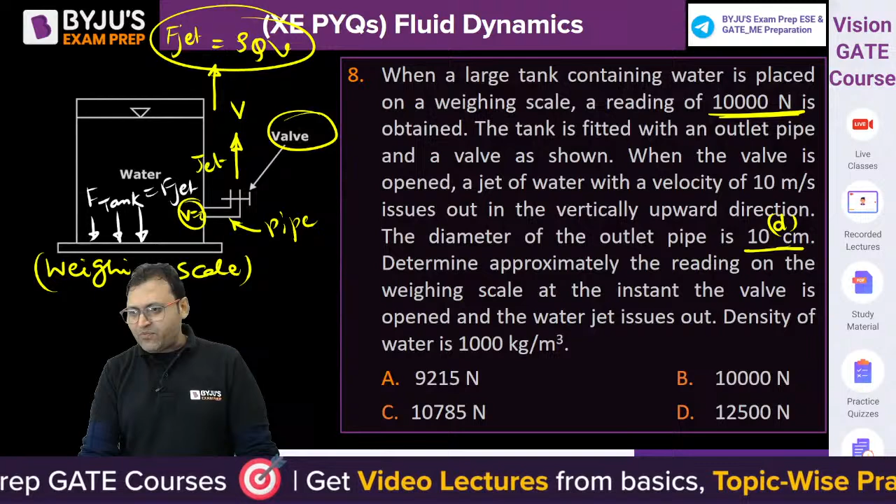The total reading of the weighing machine, W net, is equal to W of water, weight of water, plus rho Q v. This is 10,000 Newton plus density 10 to the power 3, Q is pi by 4 d square into v square.

What is the velocity? 10 meter per second, so it will be 10 square. These two will get cancelled out. So it will be 10,000 plus 1000 pi by 4 Newton.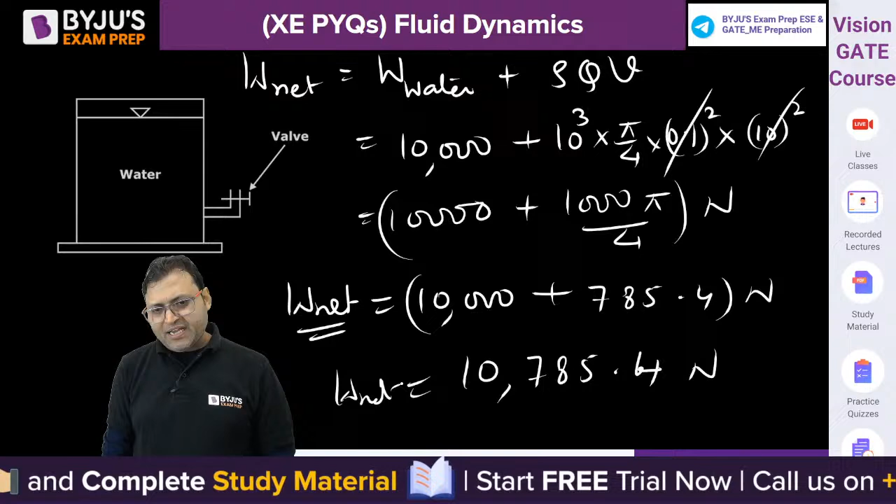What is the reading of the weighing machine? The net downward force will be the reading of the weighing machine. 1000 pi by 4 equals 785.4. So it is 10,000 plus 785.4 Newton, which will be the net downward force.

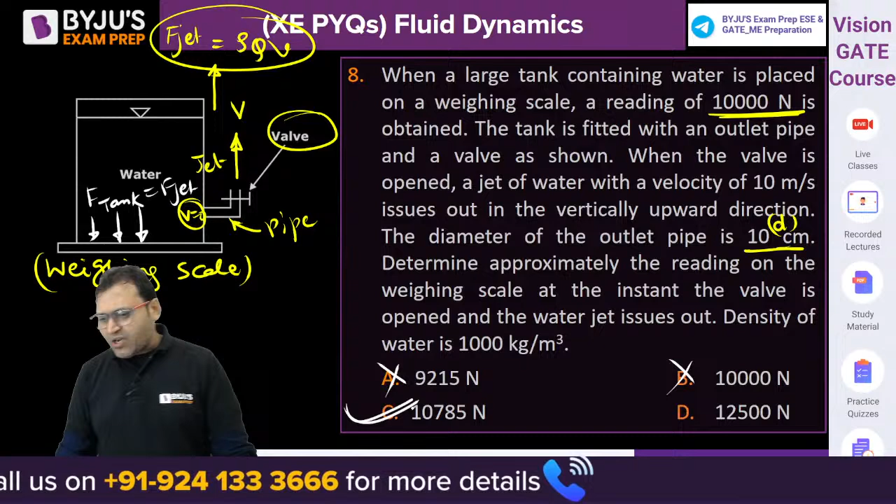It is more than 10,000, so A cannot be correct, B cannot be correct. It will be 10,785. So C will be the answer.

This is simple. Question number 9 and 10. Try to solve this one.

A two-dimensional rectangular water jet of velocity 10 meter per second. This is the rectangular water jet, the nozzle is rectangular like this, so the water jet is coming out in rectangular shape. Velocity is equal to 10 meter per second and the jet area is equal to 5 centimeter square.

Impinges normal to the flat plate. This is the plate, and it splits symmetrically into two half jets, Q1 and Q2. Let us say this is Q. So Q1 is equal to Q2 is equal to Q by 2, they will be equal.

From the mass conservation or continuity equation, discharge entering will be equal to discharge leaving. Q1 is equal to Q2 is equal to Q by 2 because they are symmetrical, each of area 2.5 centimeter square. So A1 is equal to A by 2 and A2 is also equal to A by 2, since A1 is equal to A2 given, A1 is equal to A2 is equal to A by 2.

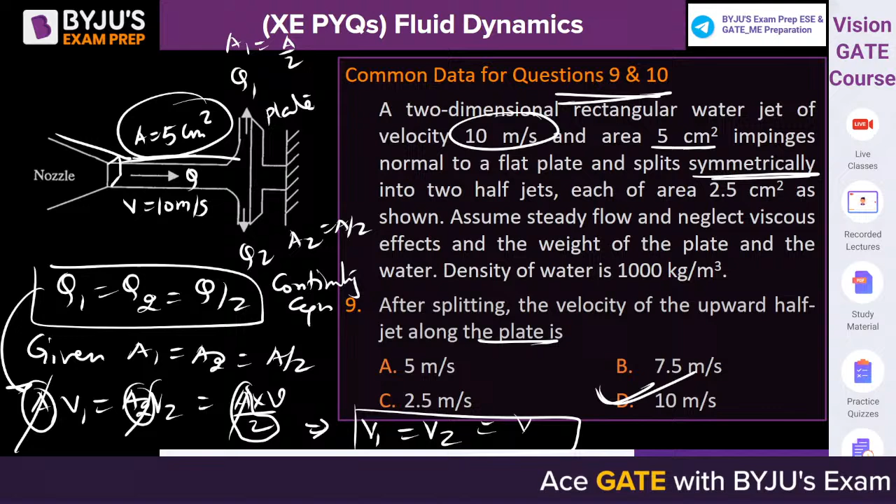After splitting, the velocity of the upward half jet along the plate has no change. Velocity will remain same, there is no change in pressure, no change in potential energy. So according to Bernoulli principle, there is no change in the kinetic energy of the fluid, the velocity will remain same.

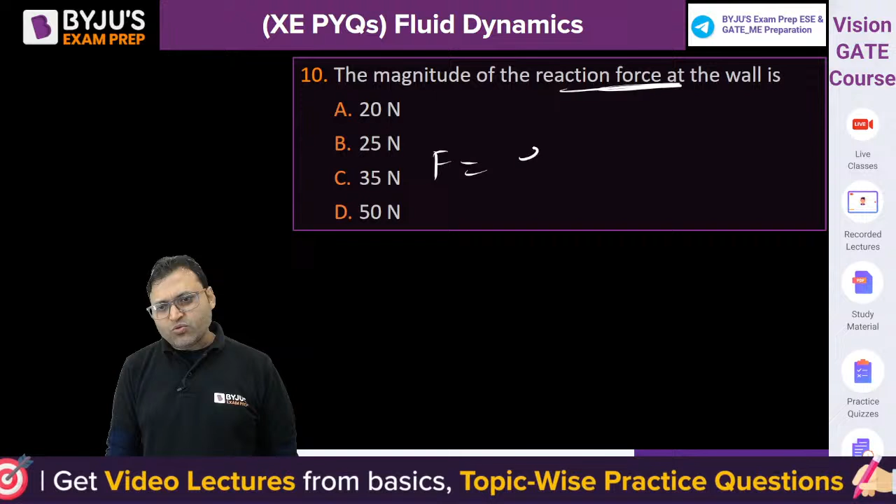10 meter per second. The magnitude of the reaction force at the wall: the force exerted on the plate will be the reaction force. So force is equal to rho Q V minus 0 in x direction, it will be rho into pi by 4 d square into v square.

Put the value: 10 to the power 3 pi by 4. What is the diameter? Diameter is 5 centimeter square, into v square. What is the velocity? 10 meter per second. This will be the force.

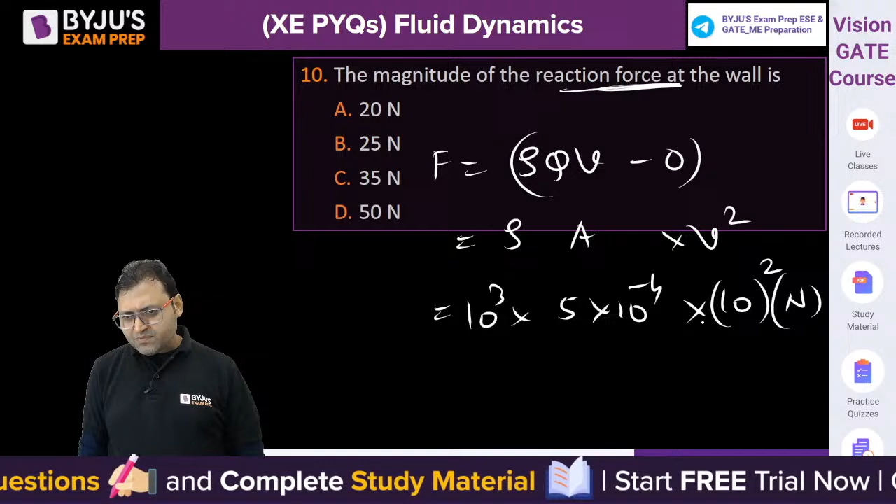Sorry, area is directly given, this is A. The area is 5 into 10 to the power minus 4. So how much is that? Area is 5, into v square, so it will be 50 Newton.

It is V square, isn't it 50 Newton? 50 Newton will be the answer.

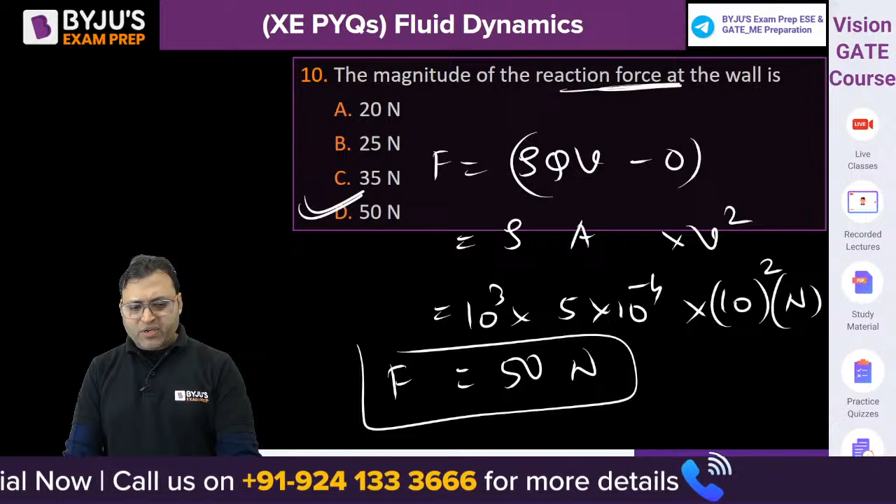Next question, please give it a try. Question number 11. Solve question number 11.

This was asked in 2009. Find the answer for question number 11. Everyone, please give it a try.

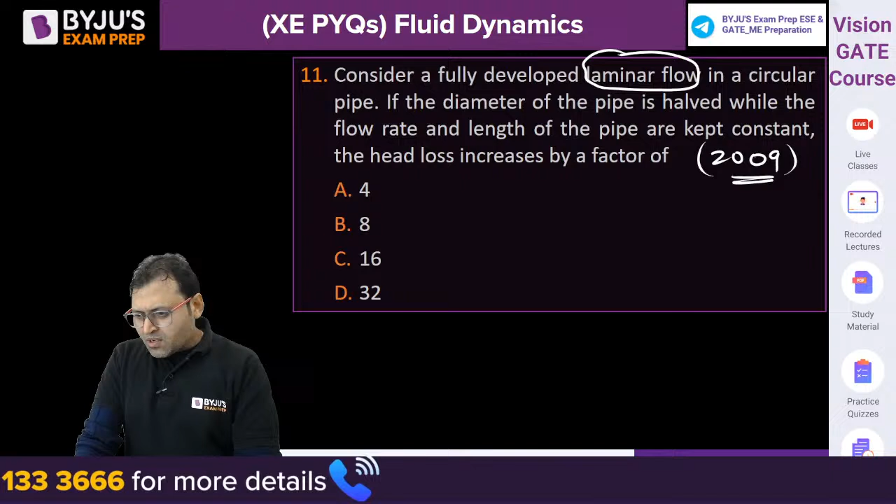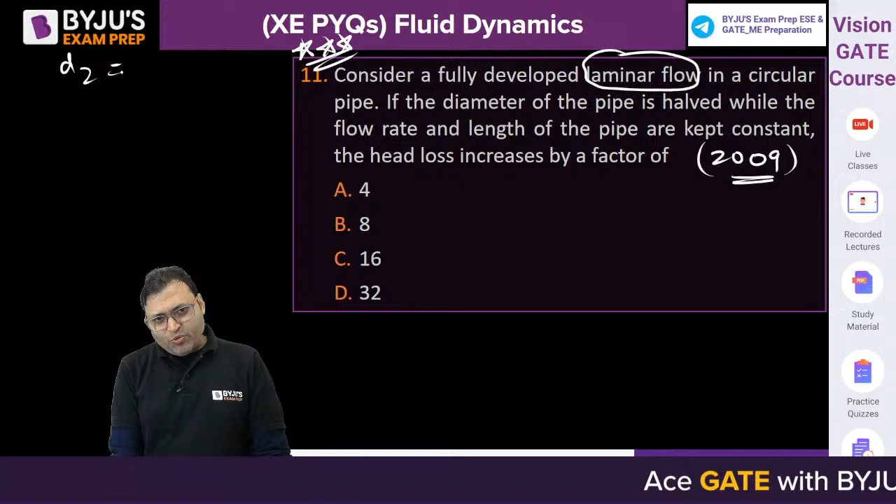Consider a fully developed laminar flow in a circular pipe. If the diameter of the pipe is halved - that is where students commit the mistake, please check carefully - D2 becomes D1 by 2, while the flow rate and the length remain constant.

The head loss increases by a factor of what? We need to develop a relation between HL and diameter. The objective is to develop a relation between HL and diameter, and we can use the Darcy-Weisbach equation.

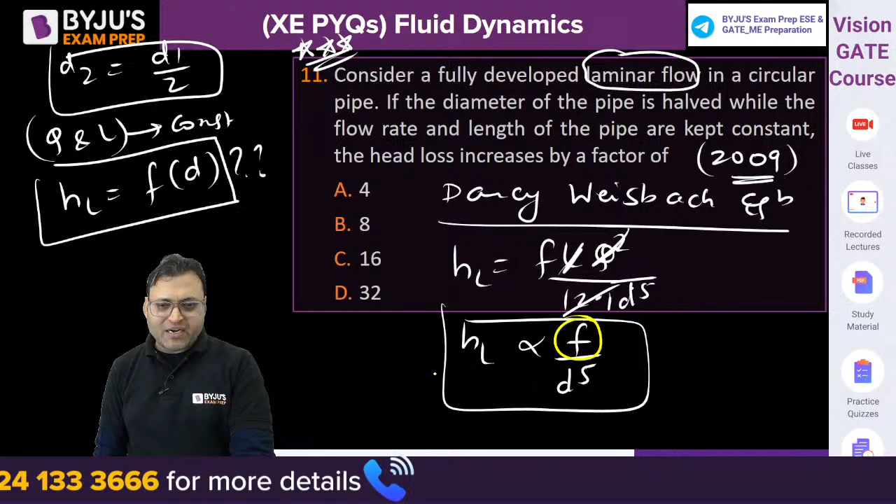HL is equal to FLQ square upon 12.1 D to the power 5. Length is constant, discharge is constant, 12.1 is constant. So HL is proportional to F upon D to the power 5. But for laminar flow, F is equal to 64 by Reynolds number, since it is a laminar flow. Call this equation number 1.

For laminar flow, F is equal to 64 by Reynolds number, or 64 mu upon rho V D. 64 is constant, mu is constant, density is constant because it is water, so F is inversely proportional to V into D. Discharge is constant: Q is equal to pi by 4 D square into V, so V is inversely proportional to D square.

If you put the value V is inversely proportional to D square, we get F is directly proportional to D. Putting that in, we get HL is inversely proportional to D to the power 4.

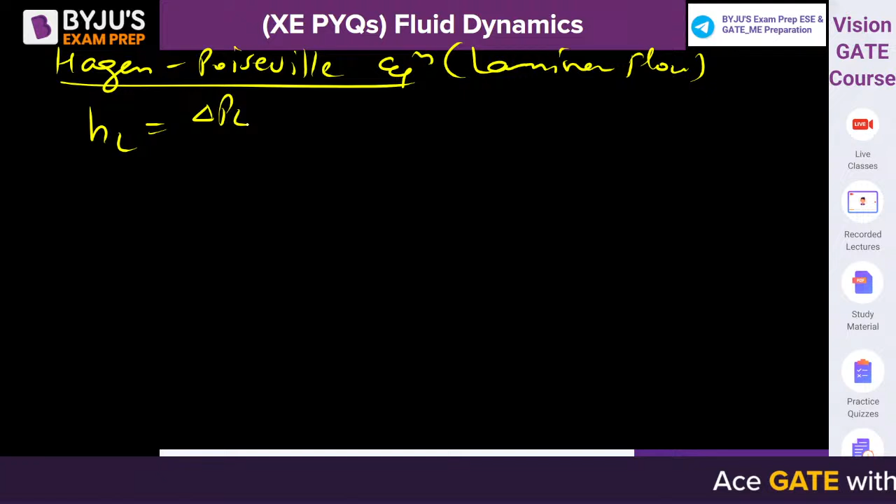Alternatively, use the Hagen-Poiseuille equation, since for laminar flow we can use Hagen-Poiseuille. HL is equal to delta PL by rho G, that is 1 by rho G times 32 mu VL by D square. Rho is constant, G is constant, mu is constant, length is constant, so HL is proportional to V by D square.

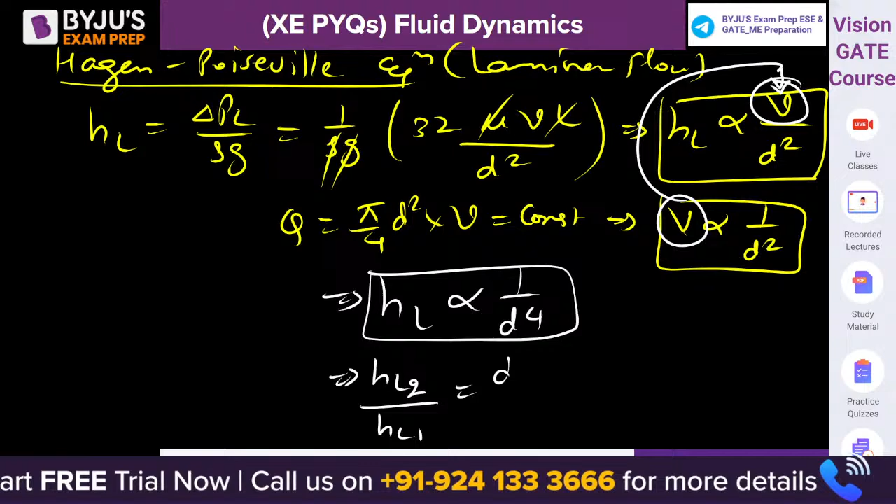And Q is equal to pi by 4 D square into V, discharge is constant, so V is inversely proportional to D square. Putting this value of V in, we get HL is inversely proportional to D to the power 4. So we can say HL2 by HL1 is equal to D1 by D2 to the power 4.

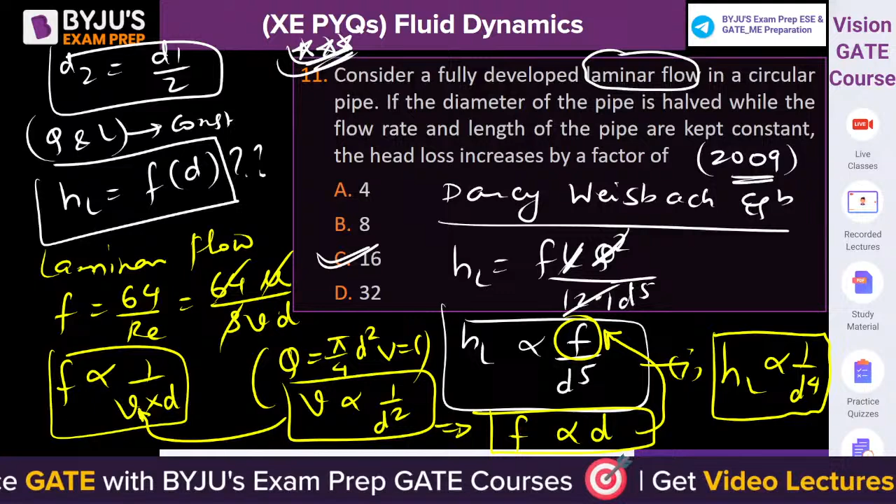What will be the answer? Head loss will increase by a factor of 16. That is how the questions are framed. D2 is equal to D1 by 2, so it will be 2 to the power 4, that is 16 will be the answer.